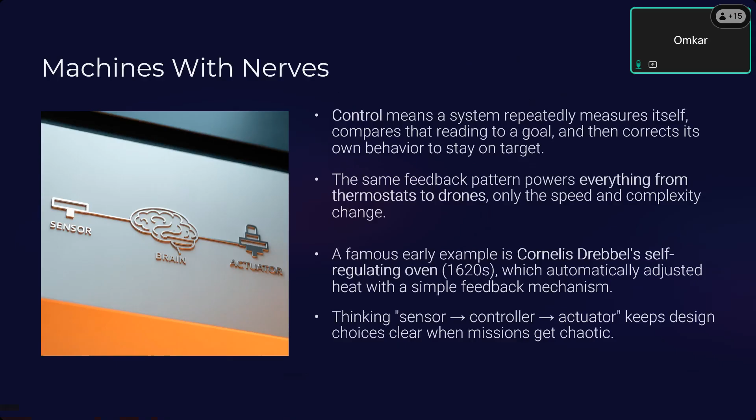So this is one of the earlier examples, Cornelis Drebbel's self-regulating oven, going back to the 1620s, which automatically adjusted heat with a simple feedback mechanism. So this thinking of sensor, controller, and actuator keeps design choices clear when missions get chaotic. So this basic infrastructure was known to humanity as long ago as the 1620s itself.

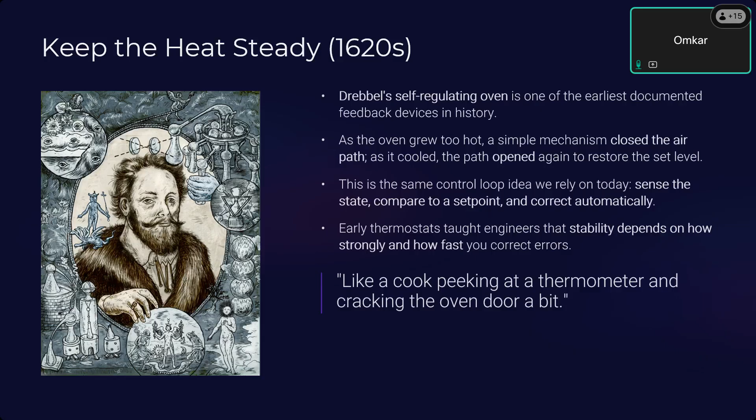Early thermostats taught engineers that stability depends on how strongly and how fast you correct errors. See, stability came a little later. With the feedback, they could see that there could be sudden jerky reactions. Now, that's when they wanted to talk about stability.

Christiaan Huygens built the first pendulum regulated clock. This is way back in 1656, transforming timekeeping accuracy. So the pendulum's steady swing acted as a natural governor, turning irregular gear motion into precise ticks.

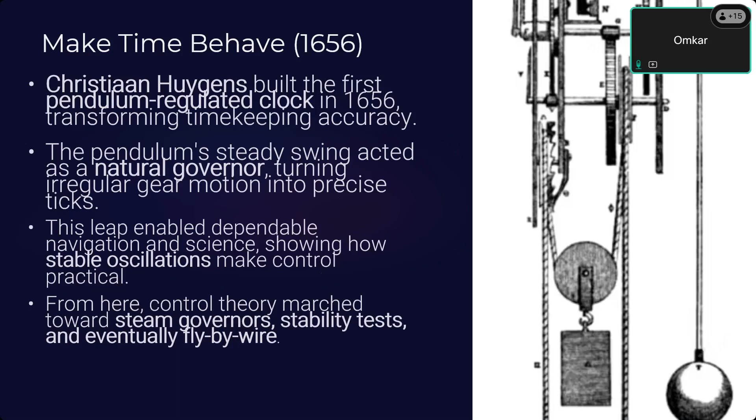So this leap enabled dependable navigation and science, showing how stable oscillations make control practical. Because without stability, the controllers would be practically useless. So this is one of the important milestones that has happened. From these, the control theory marched towards steam governors, stability tests, and eventually fly-by-wire. So if you look at the historical development, this is how it has happened.

Then we know this very famous flyball governor from James Watt automatically throttled steam to keep engine speed steady as the load changed, introducing industrial scale feedback control. So this mechanism used the centrifugal force. The concept is very simple. As speed rose, the balls flew outward and partially closed the throttle. As the speed fell, the balls would drop and the mechanism would open. So that's how it controls.

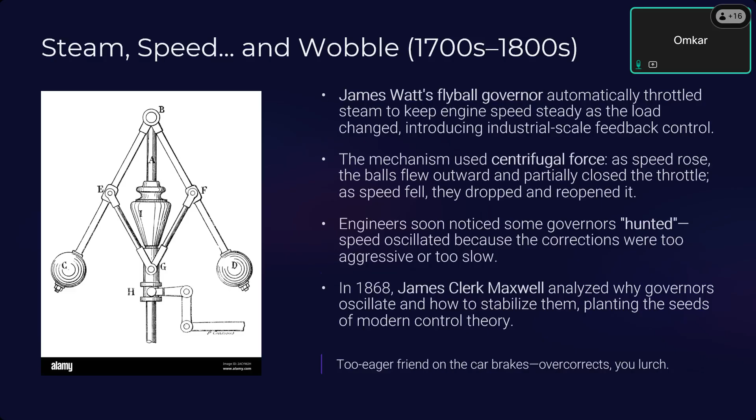So engineers soon noticed some governors hunted: speed oscillated because the corrections were too aggressive or too slow. So the next milestone is in 1868. James Clerk Maxwell analyzed why governors oscillate and how to stabilize them, planting the seeds for modern control theory. So this is how the development happened of these theories we talk about today.

In 1927, Harold Black invented the negative feedback amplifier, feeding a portion of the output back to tame distortion and stabilize gain. Then in 1934, in his paper, he explained how feedback could turn noisy nonlinear tubes into precise building blocks if you accept reduced raw gain for clean, stable behavior.

Then in 1945, Hendrik Bode gave engineers practical tools. Today we talk about these Bode plots, gain and phase margins to shape loop gain and guarantee stability. That's very, very important because these early inventors could see that without stability, this would be of no use. So the tools got developed, and unless you have a good analytical proof, you cannot depend on it.

For example, we have been talking about neural network controllers for maybe nearly 30 years, but even today, not many dare to put them on any of our aircraft where man is in the loop, because they lack this kind of analytical stability proof.

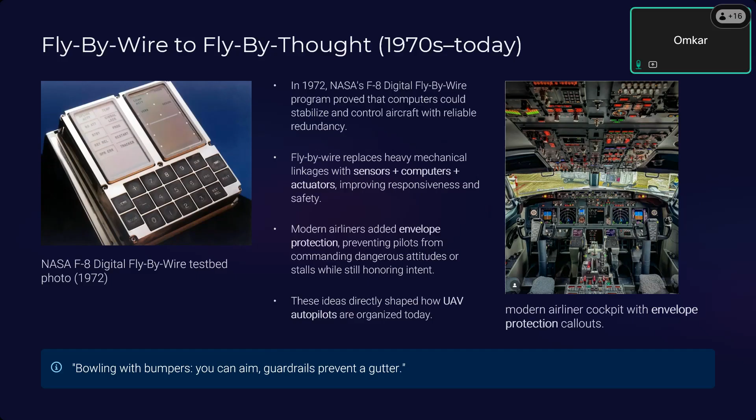Modern airliners added envelope protection, preventing pilots from commanding dangerous attitudes or stalls while still honoring the intent. So these ideas directly shaped UAV autopilots even today. That's how we are now reaching, at least as far as PID autopilots are concerned, quite stable flights.

So this is what I was talking about, fly by thought. This is the work done by us in our lab at the Department of Aerospace, IISc. The whole idea is you have these EEG headsets. We could get an EPOC headset which has 14 channels. You have to wear it and you must think.

We could only generate 4 distinct commands: right, left, up, down. So whenever we think, or generally most people are always thinking, so there are a lot of electrical activities in the brain. Some of them will reach the skull, surface of the skull, and these are the gadgets that could pick up those electrical signals. And this is a wireless headset. Through Bluetooth it will transfer to the ground control station, the computer, where you can analyze those signals.

So you can see bottom down, the signals look very crazy, but even in that, you can pick up the right features if your signal processing is good. For example, if you are thinking only about the direction right, some signal would show up that okay, this fellow is thinking about right, and you can pick up that. Similarly, if you are thinking left, not gesturing, no voice, nothing, just thinking, little focus is of course needed. Similarly, left direction, if you are thinking, one of the signals would become dominant. You have to pick up that.

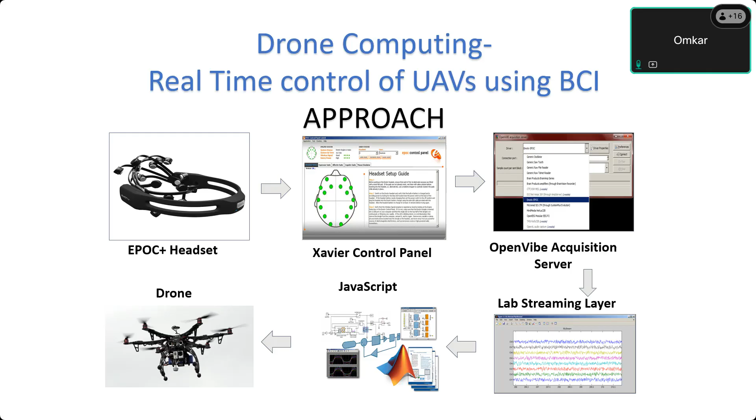Similarly, up and down. And once you can do that, then you can transfer it to the drone firmware. So that is what drone is going to understand, and you can move. So this experiment also we did. So this is our quadrangle where we took one drone, we implemented. You can see the drone flying there, and I'm sitting there on the chair. There's no hand movement, no gesture, no voice. It is just through the thoughts we could move the drone to right and left.

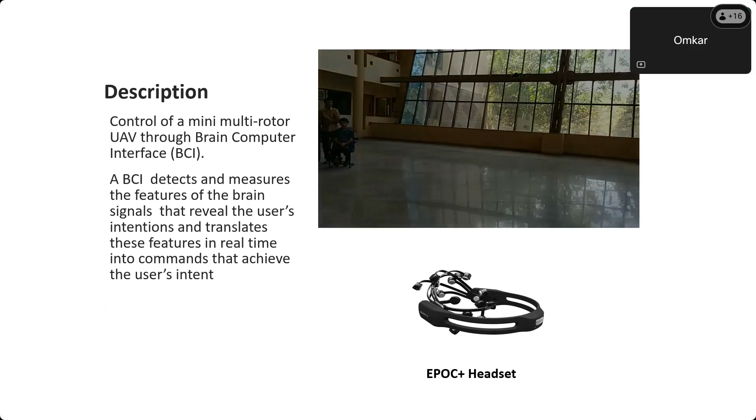Right and left movement was very easy. Up and down, we could achieve most of the times, but still that was a little shaky because this is only a 14 channel headset. But later we could not really carry forward this work too much because we wanted a more sophisticated headset. Today, this kind of headset with 256 channels are also available. But anyway, they are expensive and it needs to be explored. So, but this is a possibility. This can have a lot of implications in terms of driving the drones.

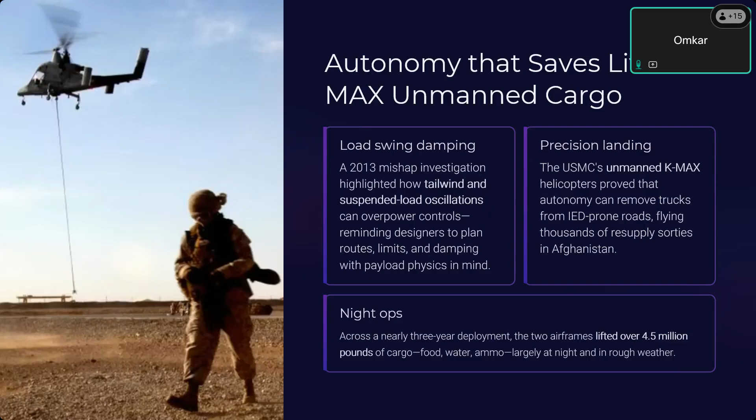Well, the lessons learned here are definitely useful for UAVs also, because in UAVs also these kind of sling loads are going to be common, because UAVs now of bigger categories are coming up. For example, you want to save some survivors anywhere, be it in some sea or some building top in the disaster prone area. So these sling load operations are important, and the related physics have to be properly understood.

Then Zipline, today it has made big civilian impact everywhere. Rwanda's partnership with Zipline, in Africa, built the world's first national medical drone network, turning hours-long road runs into on-demand flights in minutes. And such kind of experiments are also happening in the northeast of our country, India. I think Redwing is a company. I know of them, and they have done several sorties to provide emergency medicine services in the Northeast.

Reduced wastage. A peer-reviewed 2022 Lancet Global Health study found faster delivery times and a 67% reduction in blood unit expirations after drones came online. Because they have some limited shelf life, that is the worry actually. In fact, that is one of the biggest things. So drones could be of great use there as well.

So when we say these things, we should always remember that even in emergency medicine service you cannot always wait for great weather and then fly, because it's a life-saving requirement. That's why very robust control design becomes very, very vital. At the same time, we should remember that if it is not protected in the right way, then anybody can attack and spoil the whole mission. Therefore, cyber security, the controller, how you handle communication, they all become very, very vital.

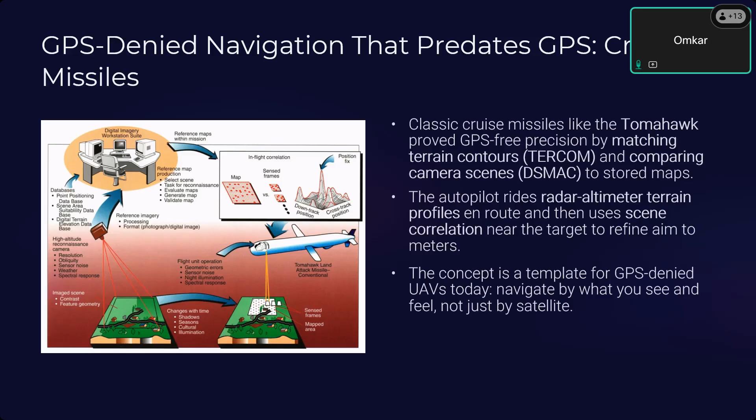So these are the two very well-known things. Jamming drowns the signal with noise, dropping command links or GNSS lock, especially near conflict zones. Recently, in fact, in this very Indo-Pak Sindoor war, this has come to experience. So the implication is: design for loss-of-link autonomy. Then spoofing transmits believable counterfeit GNSS, so receivers compute the wrong position and time. So the implication requires integrity checks and cross checks. This is where zero trust architectures come in: even though the signal is coming from your own side, you cannot trust it. You have to validate everything that comes. So zero trust architectures are on board today.

So without GPS, you have visual inertial odometry, VIO: a camera plus IMU watch how the scene moves to estimate your position locally. Great for indoors, under bridges, urban canyons where GPS is weak. Works today on PX4 or ArduPilot. You just feed VIO or optical flow into the estimator. So it's already there on our plate. And even much before this, we did some work. I'll show you.

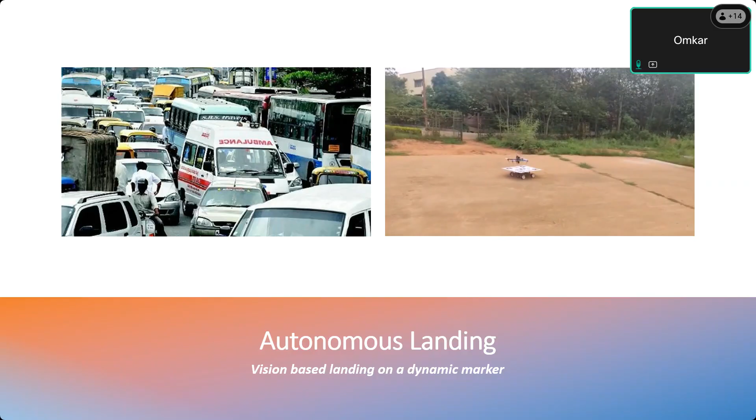So this is something we have done in the lab. Imagine a situation like heavy traffic - of course it also has military applications. We made our own small UGV with a QR code, an ArUco marker. The drone has a down-looking camera, and if it is on the ambulance stuck in traffic, the ambulance driver can trigger the drone. It can go upstream, alert the police, and as the ambulance moves, it should be able to come back and perch on the ambulance. We have developed algorithms that can do that.

Next is obstacles and non-availability of GPS, which we've discussed so far. What we have done is, we have not tried any sensor fusion. We have come out with a very lightweight algorithm using a monocular camera, with a process flow where the feature vector for each window comprises 11 optical flow and 15 Harris features.

We divide the windows into strips and then use linear regression learning, and you can see the result - it can move, and the right side shows the computation. Inside the IISc we have good greenery and tree area, so it autonomously moves from point A to point B, which is configured earlier, and avoids all the trees. This is obstacle avoidance, GPS denied. But the problem with this texture-based learning is that if you have a solid horizontal branch, this might fail.

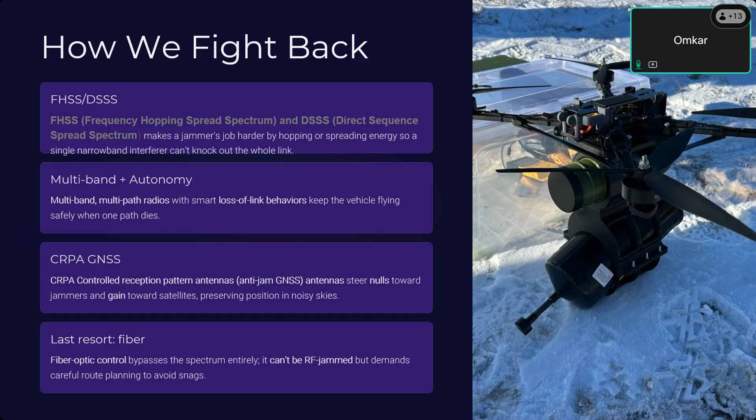Then the last resort is fiber. Recently we saw this fiber optic control, which bypasses all these spectrum issues - it has its own limitations, but no jammer can do anything against it. Recently, Ukraine has used this wire that cannot be jammed. Fiber optic drones carry a thin cable from operator to airframe, creating an unjammable, low latency control link that shrugs off RF jamming and spoofing. Units report precise terminal control for the last tens of meters because commands and video never touch contested spectrum. It is direct - it's a physical link.

Trade-offs, of course, are real. There's snag risk, since the optic fiber can snag anytime. There's also a drag penalty on the flying vehicle, and a path planning constraint, because when you want to run the fiber, you cannot have too many turns, twists, and obstacles.

Well, this has actually been used, and it has worked. Even in our country, there are moves in some known pathways. This would be a wonderful vehicle to hit some very targeted point.

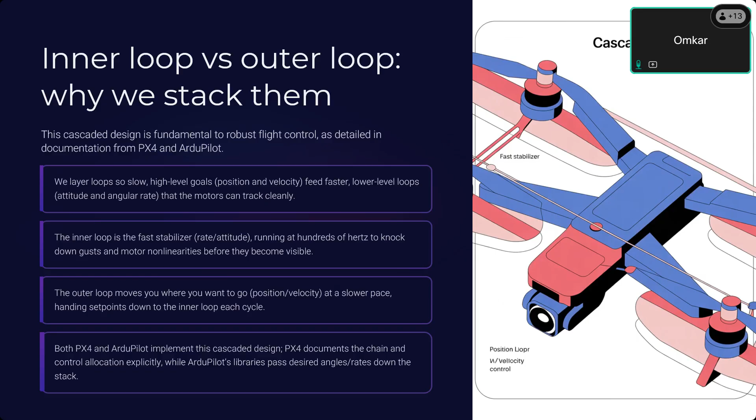The outer loop moves you where you want to go, position and velocity, at a slower pace, handing set points down to the inner loop each cycle. This makes sense because what has to be fast enough to maintain stability, and what can be a little slower to ensure proper navigation. Both PX4 and ArduPilot implement this cascaded design. PX4 documents the chain and control allocation explicitly, while ArduPilot's libraries pass desired angles or rates down the stack.

So this is a brief overview of the stack. Two kinds of loops: outer loops decide where to go - position, velocity. Inner loops keep the drone instantly stable - attitude and rate. The outer loops send set points down each moment, while the inner loops run much faster to swat gusts and track commands.

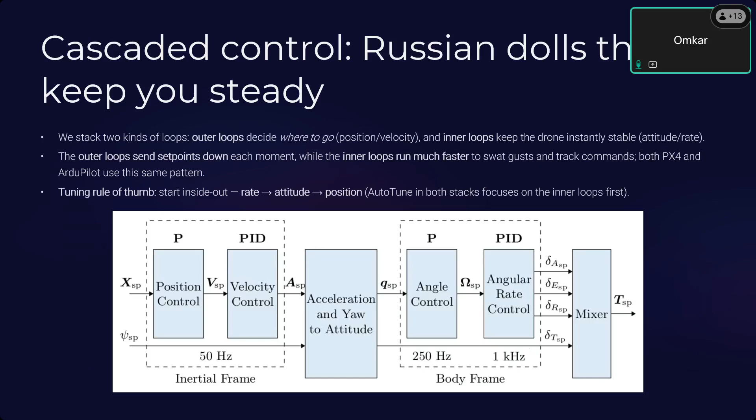Both PX4 and ArduPilot use the same pattern, and we know both are open source. So the tuning rule of thumb: start inside out - rate, attitude, position. Auto-tune on both stacks focuses on the inner loops first, because we need them to be quickly stable. So they carry the same DNA if you compare PX4 and ArduPilot.

Incidentally, both rely on EKF for state estimation. Practical differences: PX4 defaults to EKF2 and lets you switch estimators. It also ships an auto-tune that targets the rate and attitude controllers first. ArduPilot's EKF3 supports multi-lane sensing with in-flight lane switching and sensor affinity, and offers an auto-tune workflow with clear pilot knobs. So essentially that is the difference, but largely it is PID cascaded loop EKF, with some variations.

We know this PID - what P does, I does, D does. For this audience, I don't need to emphasize these things much, but still: P reacts to how far you are from the target - it's the main push that closes most of the gap fast. I cancels the lingering bias by accumulating small errors, but it must be bounded to avoid windup. Then D anticipates change by responding to the error slope, damping overshoots and smoothing motion.

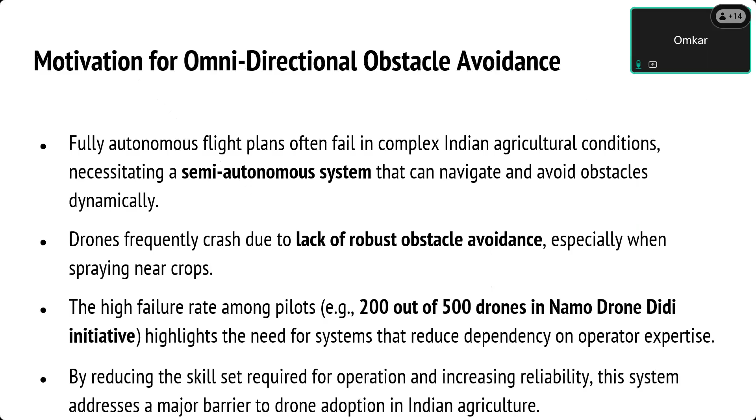So we have done this obstacle avoidance. I will not go into the details. We have used an omnidirectional radar and developed the algorithms. I'll not go into these details. We have applied for a patent. A patent is pending on this. So what I'll do is go to the result.

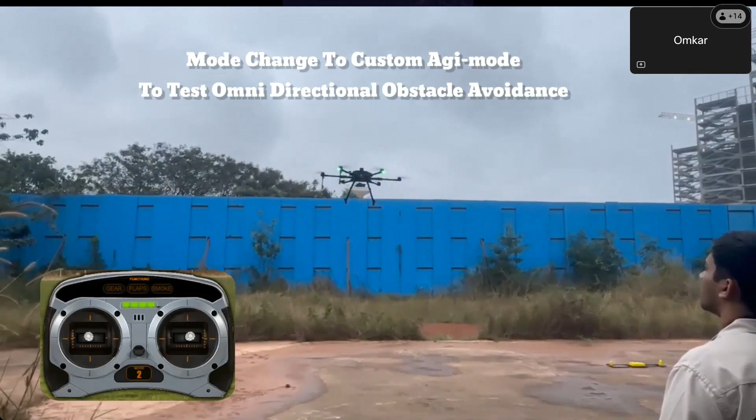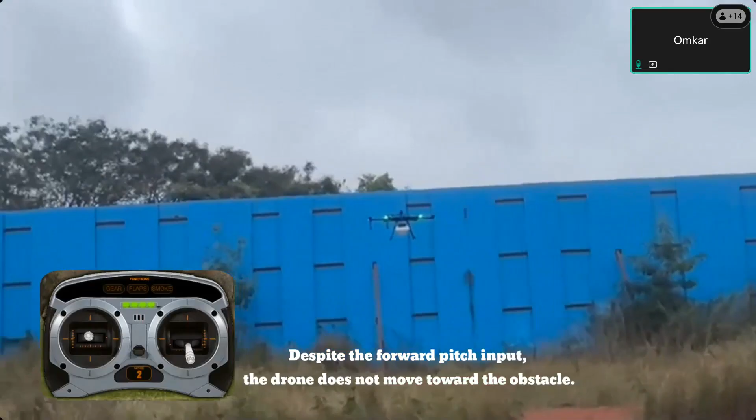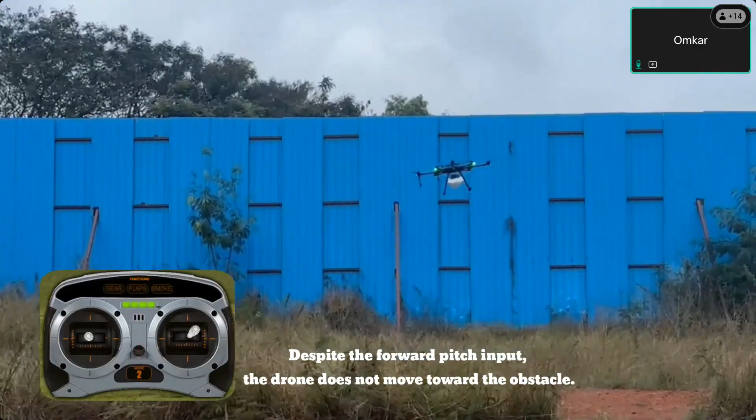So the pilot goes and you see that blue wall. So even when you want to go close to the wall, and even there if you give some pitch-up command, it won't go. Two meters away from the obstacle, despite forward pitch input, the drone does not move forward. You can see on the left side what we are giving, pitch up. Now we do the pitch up. See, when you do the pitch up also it doesn't go. So this algorithm is what we have done in the lab.

Then this is another interesting thing that's happening. We have made a company called Yaanendriya, where our team is working on the inertial navigation system. Here we are trying to overcome this GNSS limitation by using the INS, inertial navigation system. And we have tried various things using radar-based SLAM, for example, for indoor environments. This is making building SLAMs become very easy.

Now this is the flight controller we have come out with, and it compares well with the PX4 and ArduPilot. For some units we already got the order, and I'll show you a flight based on this. So this is from our Made in India autopilot.

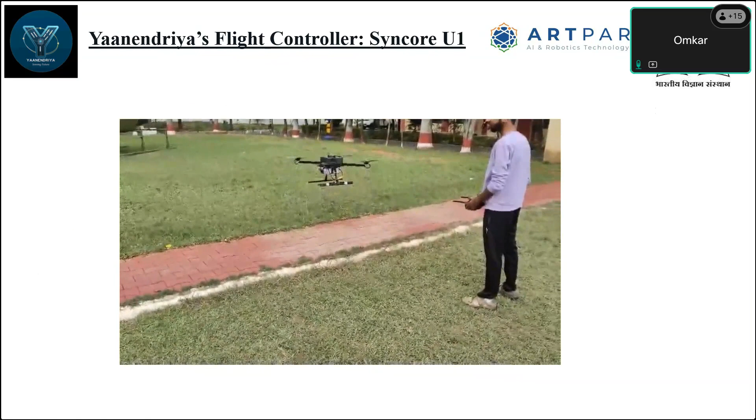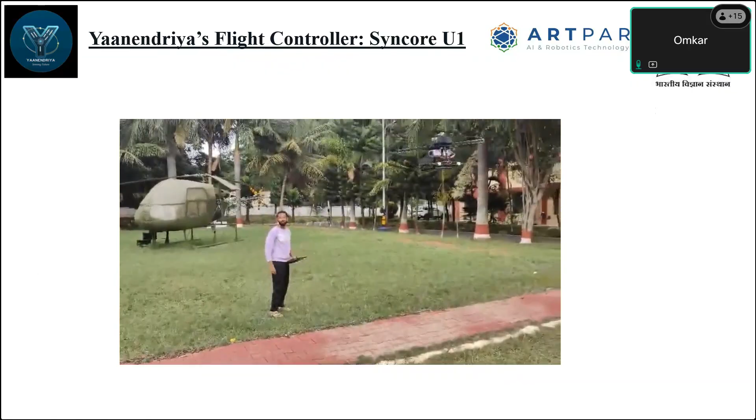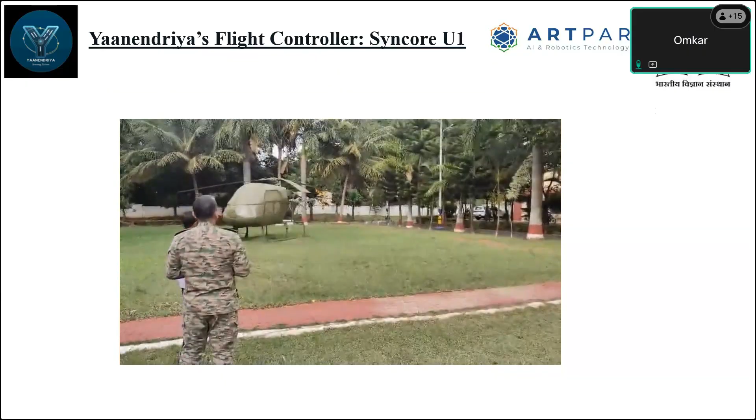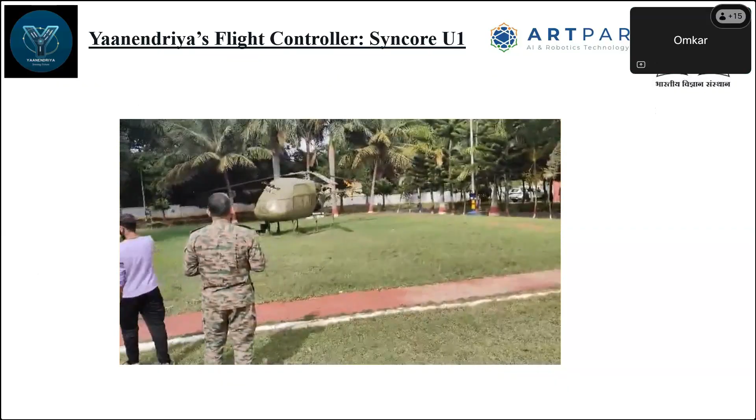I just wanted you to observe when the pilot even pushes this, it's able to stabilize very quickly. So see, now he does that. See, when he does that, it stabilizes very, very quickly. And we have been able to produce them at cost comparable to the Pixhawk Orange and such variants. We'll see how stable it is. Look at the response of the vehicle.

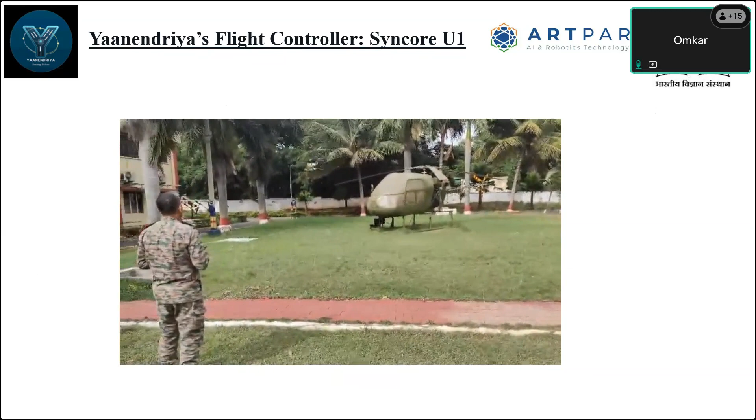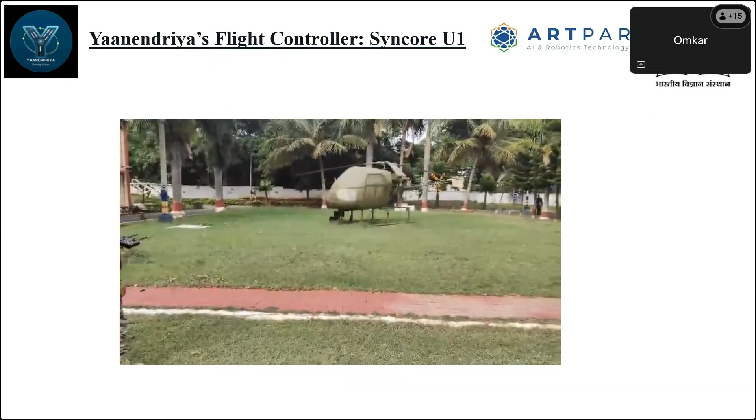So all in all, the choreography wins. Missions succeed when people and machines move in sync under pressure, letting low-level loops do their jobs even under electronic warfare. Life's not just wars, it's not just for military purpose, it's also for the good of humanity. Fly by sight, and so we should be ready to have these kinds of facilities. Now we are talking about SATCOMs also, but this is very, very important. So the link is everything. We should not lose the communication link, but be prepared for that.